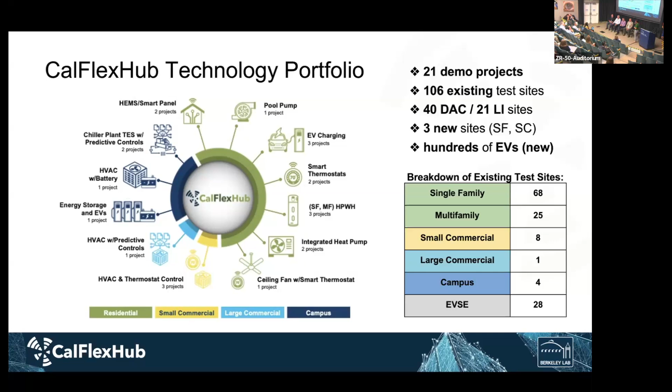And we also focus a lot on looking at the flexible load impact from these demonstration projects. So each of our speakers will dive into that for their own project that we're highlighting. But there are some high-level takeaways here that I'm going to quickly go through. So in general, we have seen that the EV charging technology and the integrated heat pump systems that Pierre will talk about, these technologies have shown ability to leverage the energy storage to shift load over several hours.

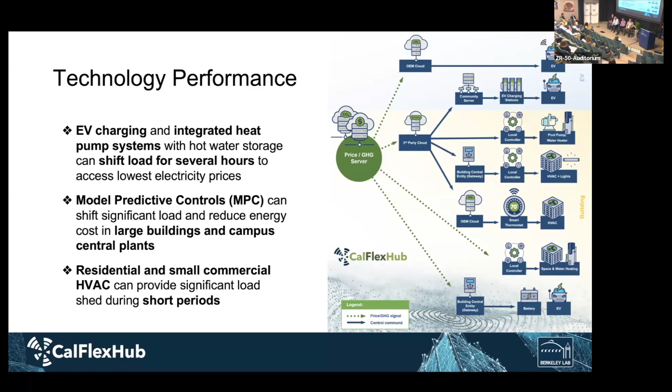All right. Thank you, Jingjing. And if I'm correct, isn't this the same panel we had last year? Almost exactly. So no, that's good because now you can see what we've been up to in the last year. Yeah, give you an update.

So Olivine has 5 different demonstration projects that we're doing on CalFlexHub, and I'm going to talk about 2 of them today. Both of them are around residential smart thermostats. And if you were here last year, you probably saw me talk about the Ecobee testing that we did and the results there. And now I want to kick it off and talk about the Emerson, the Sensi Smart Thermostat. So it's actually Copeland now. They've rebranded. It's Copeland, but it's Sensi Smart Thermostats. And you can see here this is the old model in white and the newer model in black. And I don't know if you can see there's a little green piggy bank down there on the bottom, which shows that a load shifting event is happening at this moment.

And so we went out and recruited 30 customers with 38 thermostats, so some of the customers had more than one thermostat in their home. We did get quite a few customers that were on the larger side in terms of homes than we normally see. We didn't necessarily target, and I'll get a little bit into this in the Q&A, but we didn't target any low income or DAC customers. But about half of our participants came from DAC and low income without actually targeting them, which we thought was fantastic.

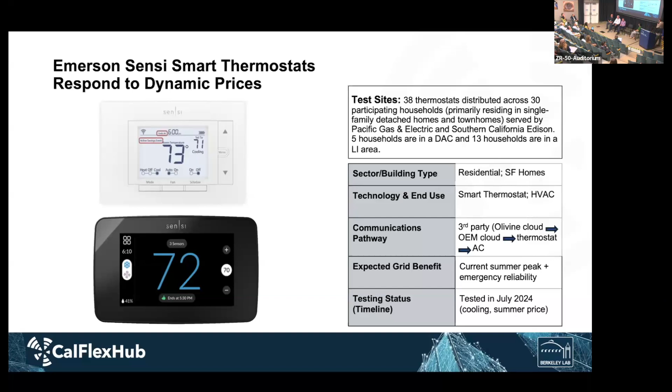Next slide, please. So this is the communication architecture. This is one of the benefits of going first: you're going to see variations of this slide about 9 more times today. This is our communication architecture where we use the CalFlexHub price server. We ingest that into our Olivine DERMS platform, the Olivine DER, and then we use our control logic to create functional control signals. So it's a cloud-to-cloud integration, and we send that over to Copeland, who then sets the functional commands to the thermostat.

Now, one of the differences between the Ecobee project we did last year and the Sensi project this year is that the Ecobee customers could set their own set points in terms of how much they want to change the set point for pre-cooling versus a load reduction period. The Sensi platform didn't have that capability for the customers to do that. So the main difference is that we were able to pick the set points.

And coincidentally, we didn't plan it this way, but it turned out that the set points customers chose were exactly what we used in this study. So I thought that was a fascinating result, that customers set their own set points at a level that we thought was appropriate as well. So they didn't try to get the incentive money and only go, oh, I'll pre-cool 1 degree and decrease 1 degree. They really took it seriously.

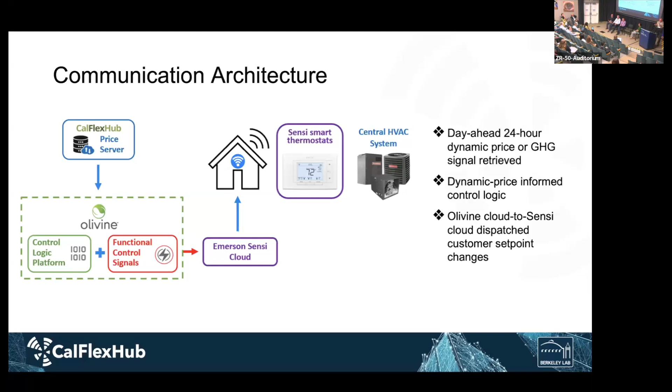Next slide, please. So this is field test number 1, the summer test. We started in late July and went into early August. And one of the key things, we didn't plan it this way, but it turned out we were in the middle of a heat wave when we were doing this testing. We wanted to do 2 things. First week, we wanted to test with pre-cooling for a 2-hour period. And next, we wanted to do no pre-cooling with a 2-hour period and see, A, what is the difference in the impacts of the load reduction? And B, did we get any comments or complaints about not pre-cooling?

And the answer to the second one is no, we didn't get any complaints. But we did see a significant snapback when we didn't pre-cool. You can see the black line is the baseline. It looks like the level of snapback is similar, but it is above the baseline, and the duration of the snapback is longer without pre-cooling. So that was an interesting thing. We expected to see that, and it proved out. And also without the pre-cooling, you could see there was a little bit of an increase in usage of the AC throughout the 2-hour period. It wasn't able to keep up as well, which is what we expected.

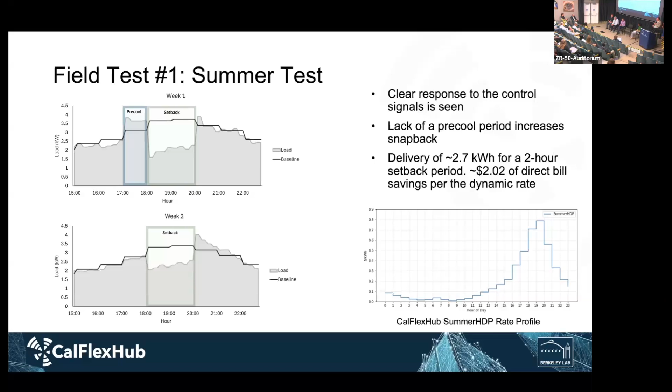But as you can see, and I think this is on an earlier slide, there definitely was a clear, measurable response from this, and customers on an individual basis were saving about $2 per event, which is not insignificant.

Next slide, final slide. I've got 1 minute left. So the smart thermostat response comparison. This shows you the difference between the Sensi and the Ecobee test. And again, one of the big differences was it was during a heat wave. If you look at the scatter plot down here, you can see to the right in the Sensi test there's a number of thermostat events that were well above 100 degrees compared to when we did the Ecobee. But when you get below 95 degrees, you can see some very similar patterns of response and load impacts from the two tests. So in the end, the results were surprisingly different. I didn't really expect to see that. But I think it was primarily because of the hotter weather and the larger homes. So this is the load reduction, right?

This is not the load. And you can see that the Sensis were losing a little bit of their load reduction over time and had to run that air conditioning more. And I think that was primarily because of the heat wave and the larger homes.

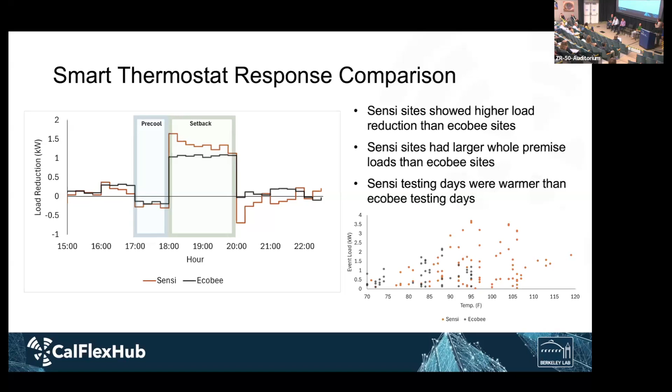So Harvest, next slide, please. Harvest Thermal, or Harvest in short, we are an integrated heating, cooling, hot water system with thermal energy storage. We participated in CalFlexHub in cycle 2 and demonstrated the ability to shift load on a dynamic price signal. And in cycle 4, we are demonstrating the accessibility and the implementation of this technology in a multifamily building.

The timeline is that it's still in progress. We wish we'd be able to deploy it in time for the symposium, but the contract is underway. It's being installed next month, and we'll be testing in November to January. Next, please.

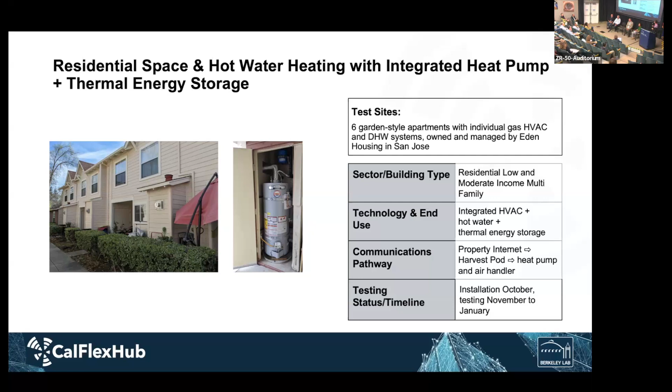So the communication architecture is that the Harvest pod, which is basically the smart controller for the system, receives the dynamic price signal via an internet access, and we'll talk about that in a minute. And this controller processes the price signal and determines when to charge the thermal energy storage on the lowest prices and when to discharge it on the highest prices.

This is basically a smart thermal battery with a capacity of 7 kWh and dispatched twice a day in the winter, so dispatching up to 14 kWh a day, which is more than you would get typically from a Tesla Powerwall because they don't typically dispatch the 100%.

And this allows us to save around 30% on energy costs on the time of use, and depending on the real-time pricing, in cycle 2, we estimate about 50% cost reduction for heating and hot water cost on real-time pricing. And we are able to shift around 90% of both the space heating and the water heating load off-peak on time of use, and about 70% on a real-time price.

Next, please. So the challenges that we found so far, and it's not finished, we haven't installed it yet, but the main challenge in multifamily, particularly low-income or moderate-income multifamily, is that we are dealing with two parties. The property owner, we have to convince and recruit the property owner, and the tenants, and we need them to enroll in the pilot, right? Which is more complicated than when you deal with a single-family, owner-occupied property.

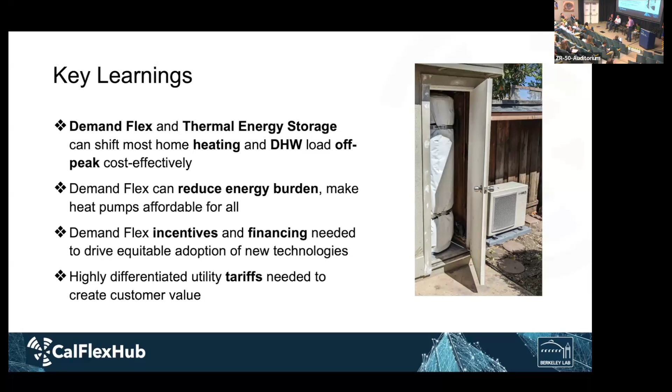Please, John. All right. I'm John Powers with Elexity, and 6 minutes goes fast, so let's get to it. Next slide. So the advantage of going third is we don't really have to talk too much about all this. We also are doing a demonstration project in commercial facilities, 2 at UC Davis. Our partners at the Davis California Lighting Technology Center did the M&V, which we'll get to in a second, and provided 2 buildings. I spoke last year about the CLTC building, and now we'll talk about the Facilities Services building at UC Davis, where we have our Elexity gateway and some Pelican thermostats.

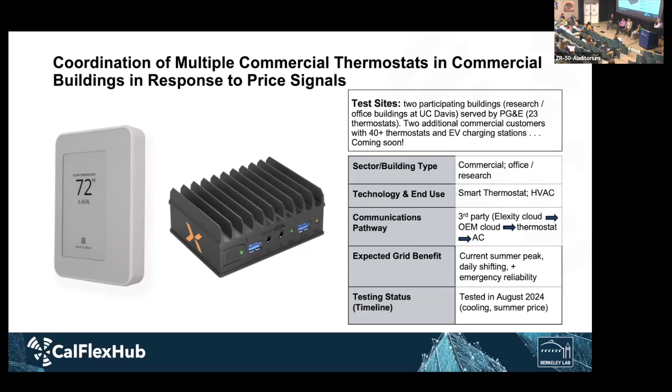Next slide. So the communication architecture looks like a lot of the other ones. I want to stress that when we do prices to devices, the device is the Elexity gateway, not the individual thermostat, and I'll explain why in just a few minutes. But we send signals to lots of different thermostats all around the same building in order to provide load shifting capability through some of the same techniques we were just talking about.

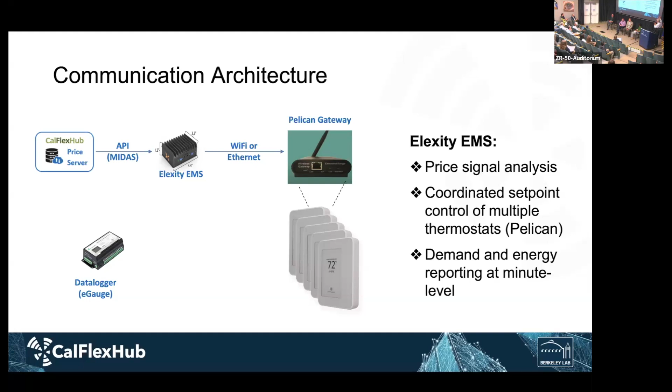Next slide. Next slide, please. There we go. So here's some cool results that our UC Davis partners gave us. We did a simple A/B test: days with the default control that the building was already operating, and days with Elexity optimized control. And the temperatures on the 2 days are very comparable.

What did Joe say? We didn't really intend this. Oh, yes, we did. It's Davis. It's hot all the time in Davis in the summertime. We did intend to have hot days to compare, and we compare some hot days here. Both of these days are 98-degree days. And the Elexity control on the left is delivering much better energy and especially demand performance than the default control on the right. We can go into how we did that, but we did.

So I want to take a minute and look at the price signal, because we talk about a building being a thermal battery, right? People use that phrase all the time, but no, it's not. I can't charge this building over here where it's cheap and then discharge the building up here where it's expensive, can I? No, we have to charge the building where it's sort of expensive and discharge it where it's very expensive, if it's even occupied during those times. So getting the prices right is especially important for HVAC-driven programs.

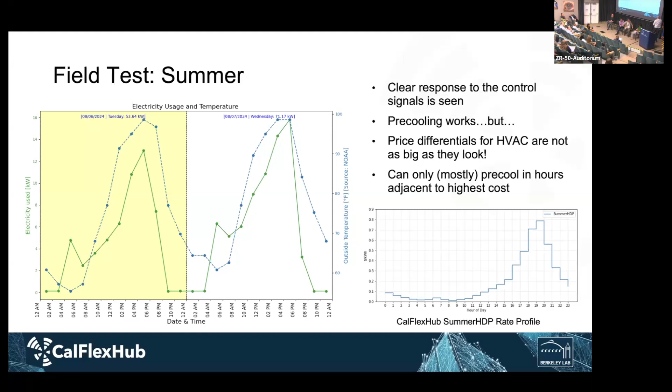If in California our peak is driven by the sun going down and the air conditioners all still being on, oh yeah, it is, then we have to structure our prices to map the policy that we're trying to improve. If we want this kind of load shifting from this kind of price signal, we may have to do something about that. And I'll get to that on the next slide too. Next slide.

Key learnings from this are that commercial buildings are awesome. So the thing about commercial buildings, especially when compared to residential buildings, is not only do they have higher thermal mass, I think we all understand that right away. A commercial building, even a small one, is much bigger than my house, probably yours. But also, there are more opportunities to diversify across the package units in a typical small to medium commercial building.

What a beautiful building. We're trying to recruit this one into a different program. This is way bigger than the one we're working on. But look at this building. Imagine how you could do load shifting in this building compared to a residential facility with one air conditioner. So I can turn half those air conditioners off and then turn the other half off and the first half back on and keep the building moderately cool for hours.

Now, how many hours depends on the thermal integrity of the building. We look at a LEED certified platinum building with lots of mass as a 5-hour battery. We look at a drafty barn as a half-hour battery. And we look at a typical building as a 2 to 3 hour battery, depending on the size and complexity of the facility. But the coordination of the units is the key for reducing demand and for shifting energy.

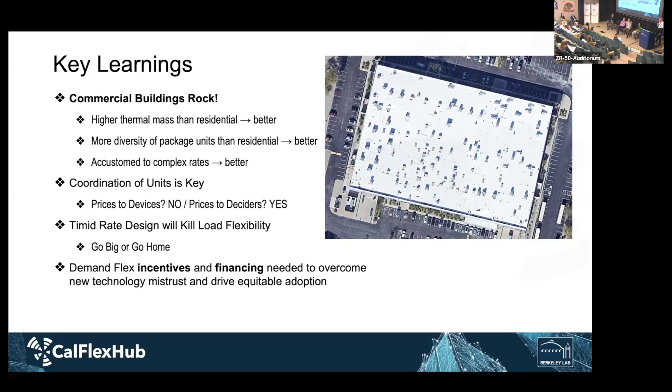Thank you so much, John. Thank you, John. Right. Well, and just one quick comment before I dive into my talk. I will comment, John, we could resolve your problem by adding thermal energy storage. So we should talk about those collaborations.

So our next project, next slide, please, is focused on price responsive control of 120 volt heat pump water heaters. And for those who don't spend 40 hours a week thinking about their water heater, which I imagine is most people out there, I will point out that the 120 volt product is considered a really important decarbonization tool because they're designed to plug into a standard wall outlet, whereas a traditional 240 volt heat pump water heater, if you're trying to replace a gas water heater, you probably have to pay an electrician $3,000 to $5,000 to make that possible. We can just skip that with the 120 volt products.

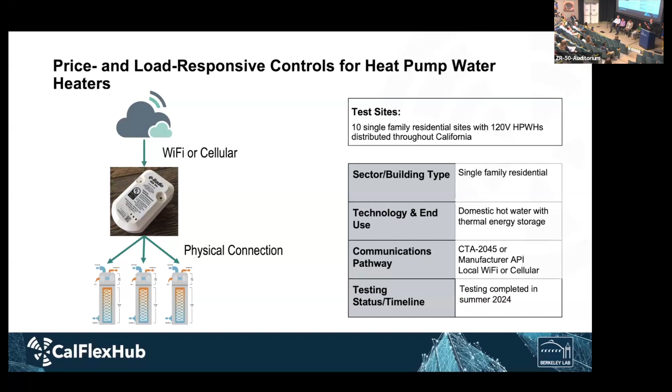So these products we have installed out in the field. We did field monitoring at 10 sites, communicating using the CTA 2045 protocol. Some manufacturers have Wi-Fi capabilities, so that's an option. We didn't use it for this project. So in this case, the intelligence is in the cloud, and then it identifies CTA 2045 signals to send and sends them via either Wi-Fi or cellular to the CTA 2045 module, which is hardwired into the water heater. And that's how we establish the communication.

Next slide, please. Now, the real innovation here is that we created an algorithm that's responsive to both the electricity prices and to the behavior of the occupants on site, right? Historically, load shifting with water heaters was done by somebody creating an engineered solution that's deployed to all water heaters in a fleet on all days. And that works pretty well if you have pretty static electricity prices, but in a highly dynamic pricing scenario, that means somebody creates a new engineered solution every single day, and I think we all know that's not going to happen. So we needed an algorithm.

Additionally, people behave differently in different homes. And so you can envision some people are high morning users, some people are high evening users, and some people just don't use much at all. So the lowest cost control algorithm is going to be different in different houses. So what we did was we created an algorithm that responds to both the prices and the hot water consumption and electricity consumption to send customized CTA 2045 signals out to different water heaters on different days. And when you do that, you can generate pretty much whatever load curve you want.

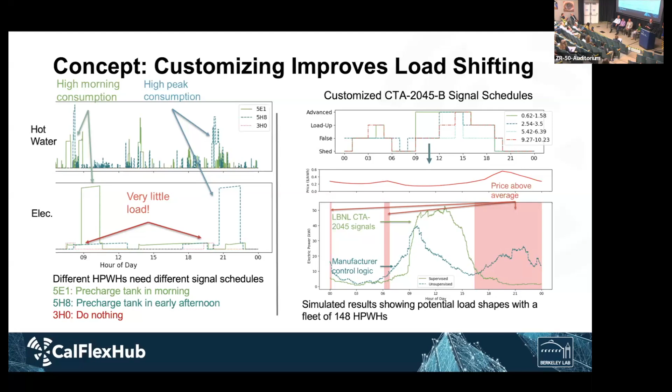In this case, we pretty much matched it to the solar production curve in the state of California. And in this scenario, that reduced the operating cost of the water heaters by about 29% and shifted 77% of the load out of the high price period. So there's a lot of potential there.

Next slide, please. So that prior data was simulation. This is now field study results showing what happened when we tested it with the water heaters out in the field. We had 10 products, all in single family homes here in the state of California. And I'll comment that they communicated via CTA 2045, not CTA 2045B, which means they did not have the advanced load up command. And I'll talk about why that's important in a minute.

And so in this case, we did testing on the CalFlexHub summer highly dynamic price schedule. And we were able to shift 52% of the load out of the high price period into lower price times of day, while reducing the operating cost of the water heaters by 46%. So there's a lot of potential there.

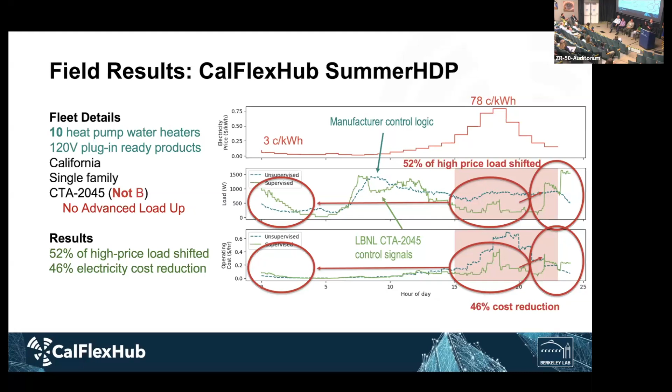Next slide, please. But those water heaters did not have the advanced load up command. Not all products support it. And the advanced load up command enables you to increase the temperature of water in the tank above the user specified set point. So you have more storage and you can do a better job of shifting load. So we went back to the simulation environment to ask ourselves, how much impact does that make?

And when we ran the simulations, we found that having advanced load up, no surprise, lets you run the heat pump more during the low price time of day to increase storage, which enables you to use more of the solar electricity that we tend to overproduce in California. Then because you have more energy stored in the tank, you're able to do a better job of shifting load away from the high price period later in the day. Oh, and all that extra electricity you consumed earlier in the day, well, that's really cheap electricity, so it doesn't actually impact how much people pay much at all.

In the simulated case, without the advanced load up command, we estimated that you could reduce people's bills by 32%. With the advanced load up command, we estimated that you could reduce people's bills by 53%. So another 2/3 savings on top. Meanwhile, you're also reducing the peak kilowatt hours consumption from a 29% reduction to a 60% reduction. So this is really important. I can't stress that enough.

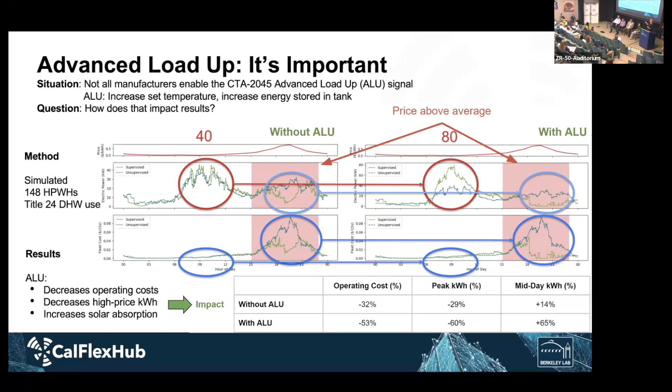And also, this is really important. Large changes in price yield better results. I only had one result slide in there, so this story's not told that clearly, but we also looked at time of use prices that had a difference of like 3 to 5 cents per kilowatt hour. No surprise, people saved 5 to 10% instead of 30 to 50. We shifted 30% of load instead of 60. So it's still possible, but it's not as good. We need to look at how we design rates to make sure we're encouraging this.

Also, I'd like to point out that the CTA 2045 communication module costs a couple $100, has to be shipped to the site, needs to be manually installed, and this is kind of a barrier to adoption. If we can make it something that is free, already installed when the water heater comes out of the box, it's a lot easier to scale this up.